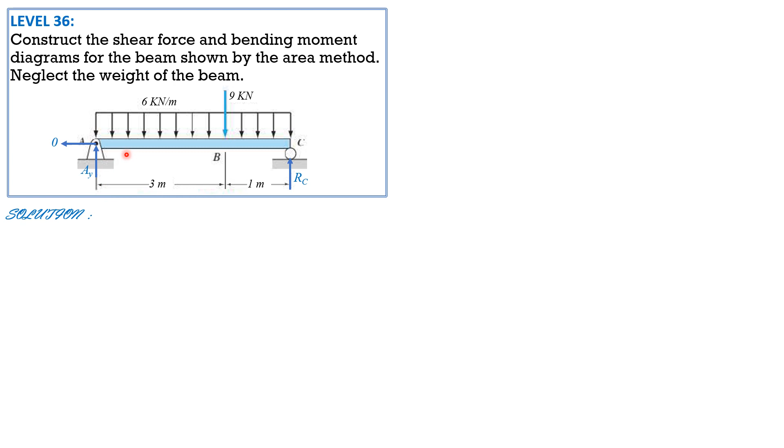Summation of moments about C equals 0. So we have AY times 4 minus 6 times 4 times 2 minus 9 times 1 equals 0. Solving, AY is equal to 14.25 kilonewtons. Likewise, summation of moments about A equals 0. R sub C times 4 minus 6 times 4 times 2 minus 9 times 3 equals 0.

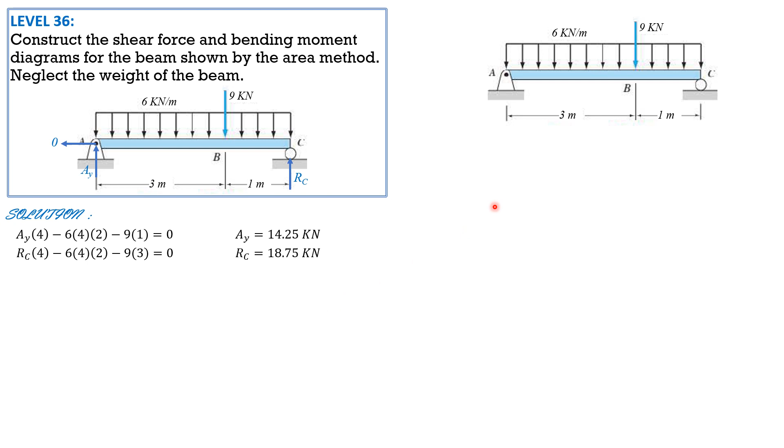So R sub C is equal to 18.75 kilonewtons. So if you check summation of forces in Y, it should be 0. So 6 times 4 plus 9, 33. And this is also 33 kilonewtons. So we are now ready to construct the shear diagram as well as the moment diagram. So let's put the reactions.

14.25 kilonewtons, 18.75 kilonewtons. So first, we have an abrupt upward increase of 14.25 for the shear. Then the area of this is negative 6 times 3, negative 18. Since this is zero degree, 14.25 minus 18 is negative 3.75. We connect them with a straight line because the slope is equal to negative 6.

Remember the relationship between the shear and the load. So the slope of the shear diagram corresponds to the intensity of the load, which is negative, in this case negative 6. So 14.25 plus negative 18 is negative 3.75. Then we have a downward load, so negative 3.75 minus 9 is negative 12.75. Then minus the area of this loading, which is again negative 6 times 1, negative 6.

So we have a sloping line downward, so negative 12.75 minus 6, because this is zero degree, so here first degree, negative 18.75, and that closes because we have a reaction of 18.75. Now for this distance where shear is 0, it can be solved by similar triangles. So let us say x1 is to 14.25 equals 3 minus x1 is to 3.75. Then you can solve for x1.

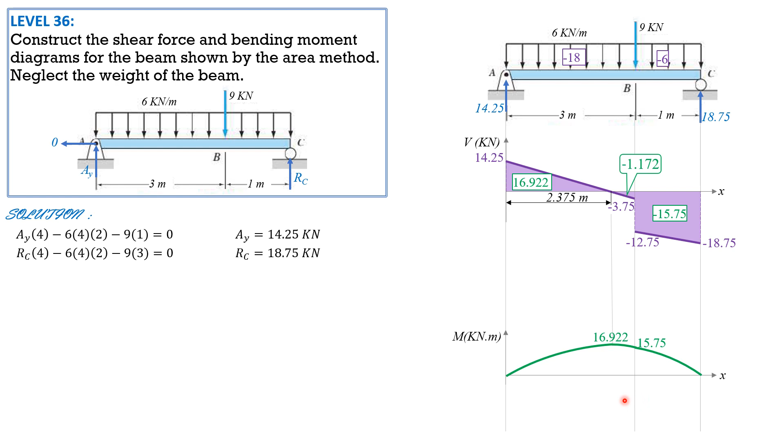Then finally, from negative 12.75 to negative 18.75 slope, connect them with a smooth curve, so it is concave downward again. And 15.75 plus negative 15.75 is 0. So it looks like that. So that's the moment diagram, shear diagram, and the maximum.

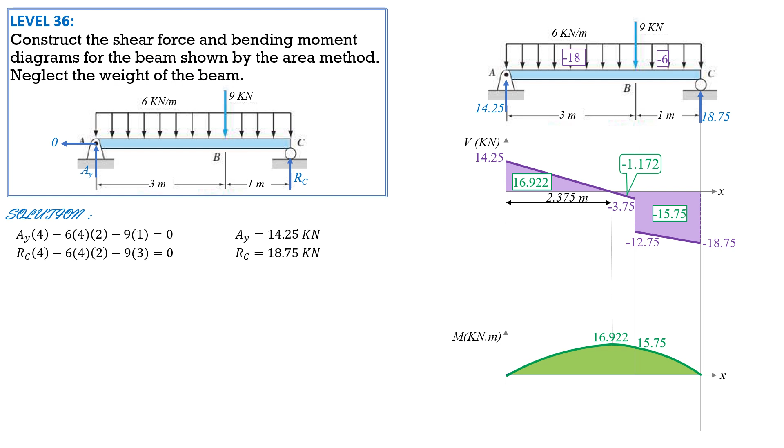So that's it for this problem, because we are just asked to construct the shear force and bending moment diagrams by the area method.

Level 37: construct the shear force and bending moment diagrams for the beam shown by the area method. Neglect the weight of the beam. What are the values of the shear and moment at x equals 6 meters? Determine the maximum bending moment. The maximum bending moment is either positive or negative. Take note of that. But in this case, because the beam is end supported, we expect positive moment only. There's no negative moment for this case, because the expected bending of the beam is positive like that.

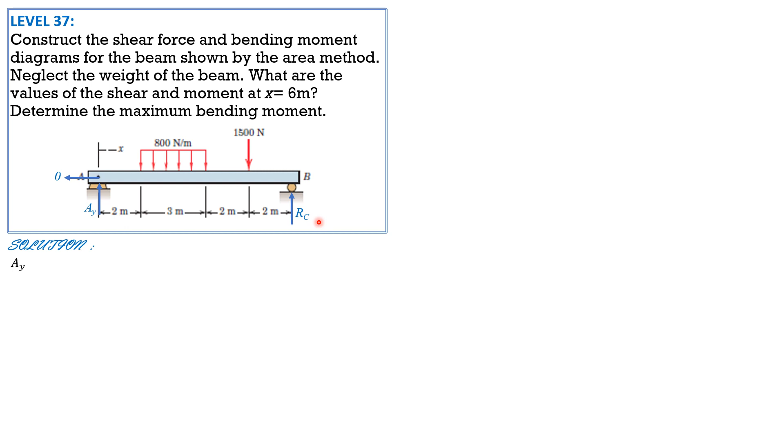So let's call the reaction here AY and AX, but AX is 0 again. There's no inclined or horizontal load. Then here RB. Summation of moments about C equals 0: AY times 9, minus 800 times 3 times 5.5 (1.5 plus 4 is 5.5), minus 1,500 times 2 equals 0. So AY is equal to 1,800 newtons.

Then summation of moments about A equals 0, counterclockwise positive. So R sub C times 9 minus 800 times 3 times 3.5 (1.5 plus 2 is 3.5), minus 1,500 times 7 equals 0. So R sub C is equal to 2,100 newtons. Then you check if it is in equilibrium vertically.

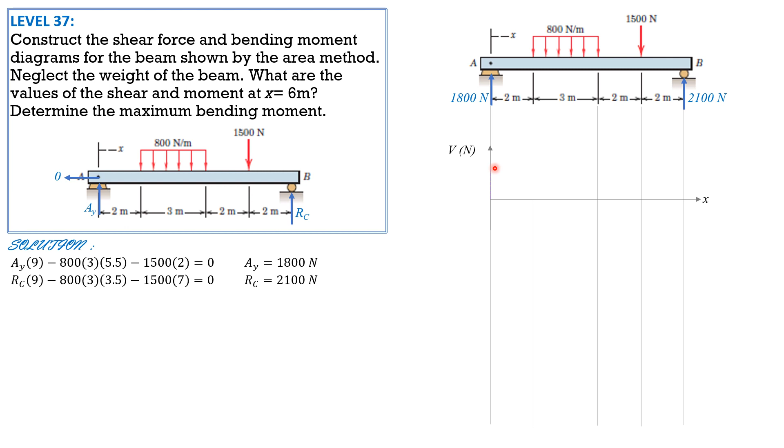So let's now construct the shear force and bending moment diagrams. Let's put the reactions here: AY 1,800 and R sub C is 2,100. So this is the shear diagram, and the shear is in newtons. Take note that X is in that direction. So first, we have to abruptly rise from 0 to 1,800. There's no change in load in this portion, so that 1,800 remains constant.

There's nothing to add. Then minus the area of this loading, which is negative 800 times 3, negative 2,400. So 1,800 minus 2,400; that's 0 degree, so first degree here, it decreases. 1,800 minus 2,400 is negative 600. Then between this point and that point, no change in shear, no change in loading, so it remains constant. Then minus 1,500: negative 600 minus 1,500 is negative 2,100. Then between this point and that point, no change in shear, so this is just horizontal. Then it closes because we have an upward force of 2,100.

So let's compute this distance. Again, this distance is either solved by similar triangles. We have similar triangles here. So you may call this x1 is to 1,800, then 3 minus x1 is to 600. Then you can solve x1 equals 2.25. But the easier way is shear, which is 1,800, divided by the intensity of the load, 800. 1,800 divided by 800 is 2.25. So therefore this is 0.75.

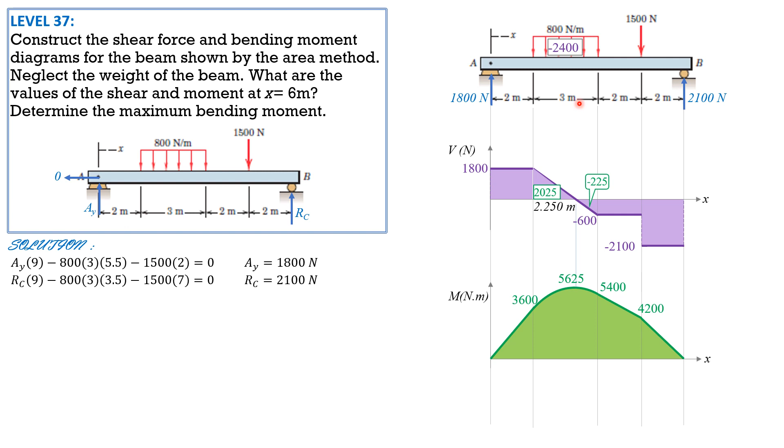So this is the moment diagram. From the figure, the value of the shear when x is 6, this is 2, 3, so 6 is in between here. Since the shear is constant at negative 600, the shear at x equals 6 is negative 600.

Then the moment at x equals 6 is here, so it is 5,400 plus the area, which is a rectangle, negative 600 times 1. Because of 6 meters, the area we add is only negative 600 times 1. 5,400 plus negative 600 is 4,800. So the moment at x equals 6 is 5,400 minus 600 times 1, or 4,800 Newton meter.

Then the maximum bending moment is 5,625 Newton meter, and it occurs at 2 plus 2.25, or at x equals 4.25. Remember, we base it from the origin, which is at A. So that's it for this problem.

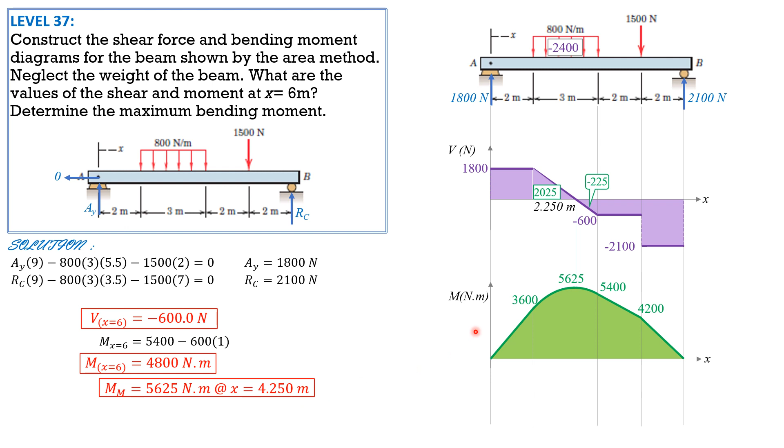Level 38. Construct the shear force and bending moment diagrams for the beam shown by the area method. Neglect the weight of the beam. The end couple M1 is adjusted so as to produce zero moment at the fixed end of the beam. Find the bending moment M at x equals 4 feet.

So this is the figure. Take note that the moment at the left is 0, and we're going to find M1. So the vertical reaction RL and 0 RX, then ML, which is 0. First, summation of forces in Y equals 0. So RL minus 200 times 8 equals 0. So the reaction at the left vertical is 1,600 pounds.

Then summation moment at the left equals 0. ML plus 200 times 8 times 4 minus M1 equals 0. Take note, ML is 0. So M1 is equal to 6,400 pound-foot.

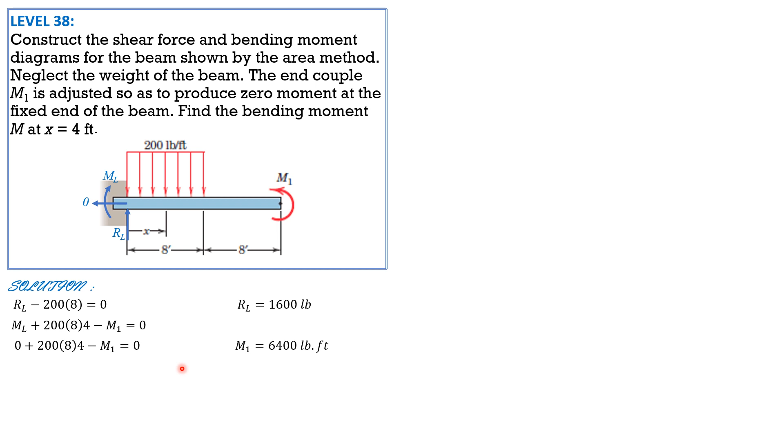So we are now ready to sketch the shear and moment diagram by the area method. Let's put the reactions, only vertical reaction because the moment at the left is 0, and M1 is equal to 6,400. So first, we go up 1,600, then minus 200 times 8, that's 1,600, so that makes 0 here. Connect 1,600 and 0 with a straight line of slope negative 200.

Then 0 here. The area is negative 1,600, so that makes it 0. Then there's no change in shear here, so 0 everywhere. So that's the shear diagram. The area is 1/2 of 8 times 1,600, so 6,400 the area.

Then for the moment diagram, it begins with 0. The slope of the tangent initially is 1,600, and here it is 0 because the shear is 0. So it's horizontal here; connect them with a concave downward curve like that. So from 0 to 6,400, then there's no area here, so that means it's constant. Then it closes because we have 6,400 there. So that's the moment diagram.

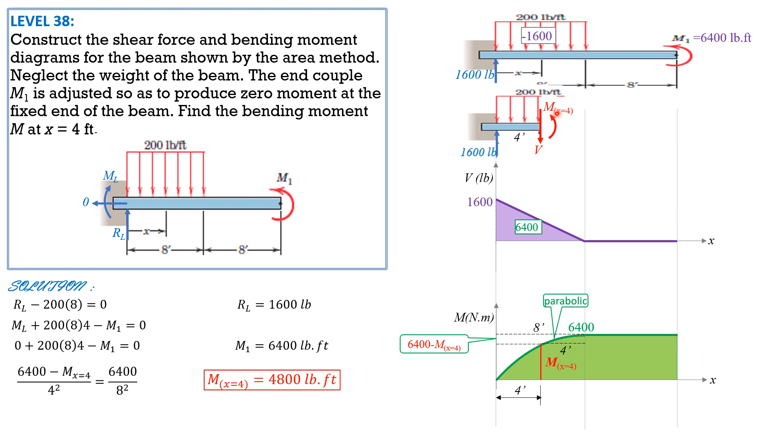For the other solution, let's have the free body diagram of this portion up to x equals 4. Positive moment is counterclockwise. So summation of moment about this section: moment at x equals 4 is 1,600 times 4 minus the moment of the load, 200 times 4 times moment arm, 2 feet. And the result is the same, 4,800 pound-foot. So that's it for this problem.

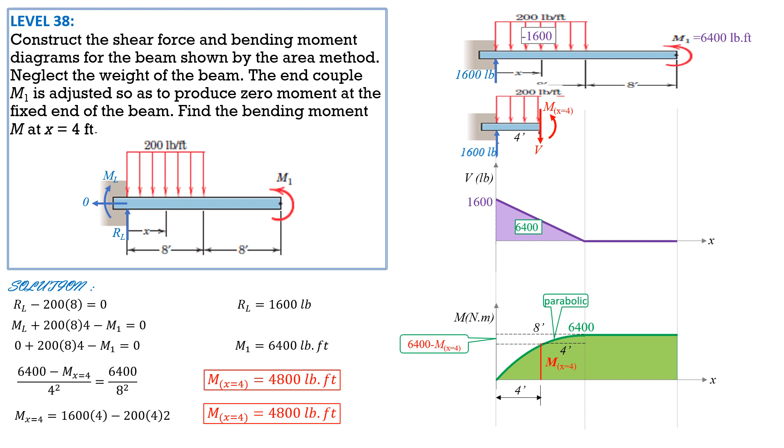Level 39. The I-beam supports the 1,000 pound force and the 2,000 pound-foot couple applied to the 2-foot strut welded to the end of the beam. Calculate the shear V and the moment M at the section midway between A and B without drawing the shear force and bending moment diagrams.

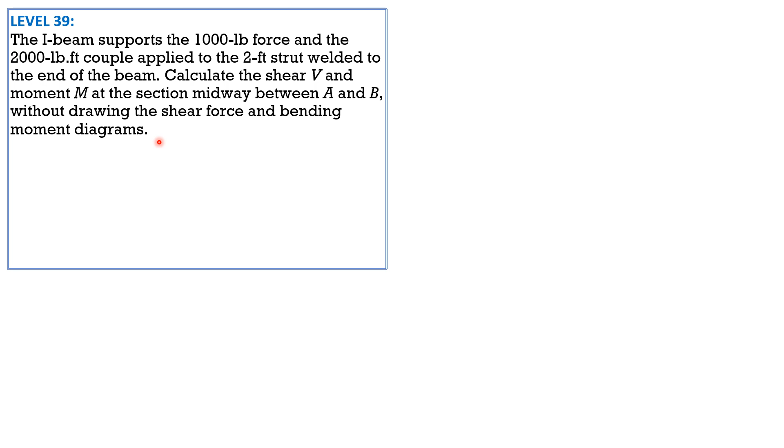So take note, we don't need to draw the shear force and bending moment diagram, so we'll just make use of the free body diagram. So this is the figure. We will call the reaction at A as RA and at B, BY and BX. Then summation moment about B equals 0.

The 1,000 pound force has two components, horizontal, which is 1,000 times 3 over 5, and the vertical, which is 1,000 times 4 over 5. The horizontal component will have no moment at B, so just concentrate on the vertical component. So RA times 3 minus 2,000, then minus the moment of the vertical component of the 1,000 pound force, which is 1,000 times 4 over 5 times 6, equals 0.

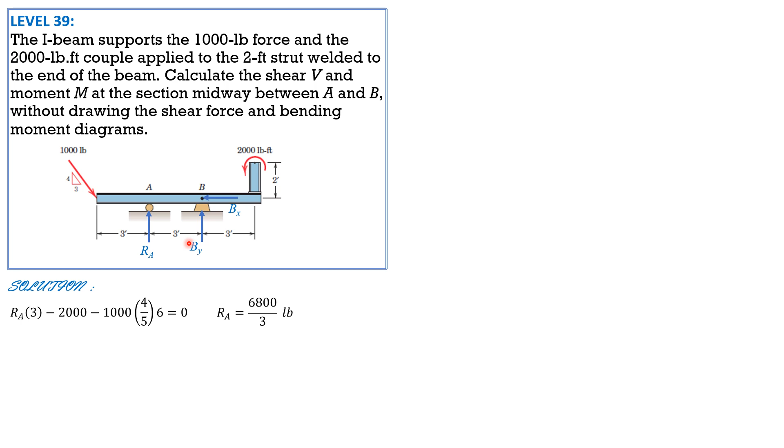So RA times 3 minus 2,000 minus 1,000 times 4 over 5 times 6 equals 0. So RA is equal to 6,800 over 3 pounds. There's no need to compute BY because we are only interested in the shear and moment at the section midway between A and B.

So let's draw the free body diagram as shown. And we have to put shear, which is downward, and moment, which is counterclockwise at the section. So this is 1.5. Let's remove that and replace it by its components, namely 600 pounds, which is 1,000 times 3 over 5, and the vertical component is 800 pounds, which is 1,000 times 4 over 5. And shear here, and moment counterclockwise.

So from the figure, the shear is equal to 6,800 over 3 minus 800. And that's the normal, although not needed. 6,800 over 3 minus 800. So the shear force at the section midway between A and B in decimal is 1467 pounds.

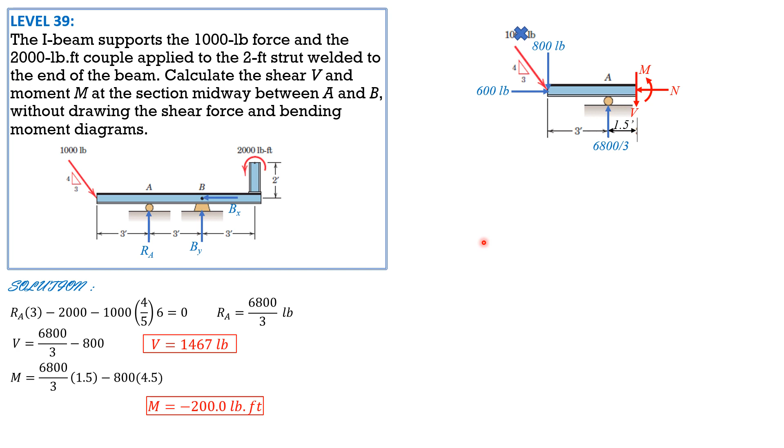Then for the moment at this section, summation moment about here is 6,800 over 3 times 1.5 minus 800 times 4.5. So the moment at that section midway between A and B is negative 200 pound-foot. So that's it for this problem.

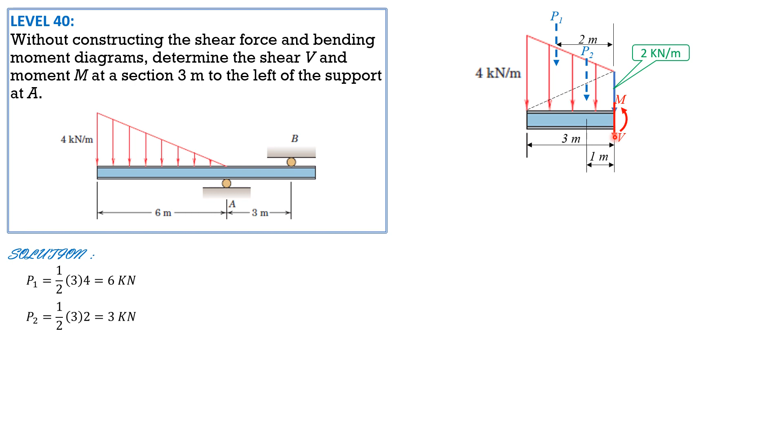So shear plus P1 plus P2 equals 0. That means shear is negative P1 minus P2. P1 is 1/2 of 3 meters by 4 kilonewton per meter, and therefore it is equal to 6 kilonewtons. P sub 2 is 1/2 of 3 times 2, so it is 3 kilonewtons. So again, shear plus 6 plus 3 equals 0. So shear at this section is negative 6 and negative 3, so negative 9 kilonewton.

So summation moment about this section. Moment plus P1 times 2 plus P2 times 1 equals 0. So moment is also negative. It is negative 6 times 2 plus negative 3 times 1. So the moment is equal to negative 15 kilonewton meter.

So that's it. That's the technique when we are required to determine the shear and moment at a section without constructing the shear force and the bending moment diagrams. Take note that we can do so by just purely constructing the free body diagram. And I hope that you can remember that whenever you are told to do so, there's no need to draw shear and moment diagrams.